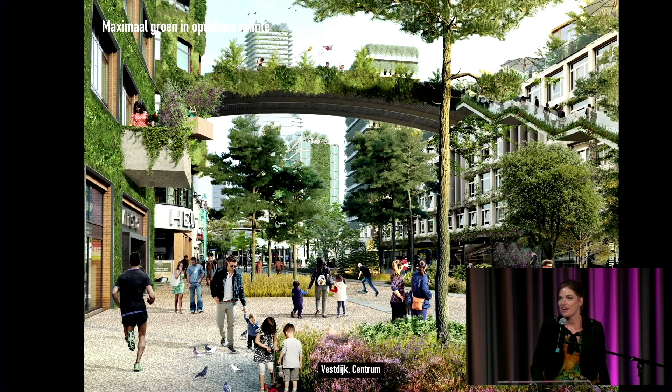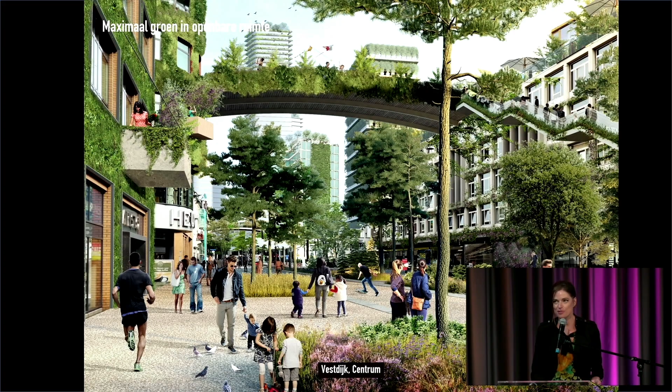You might say, Sana, this is crazy, nobody will do this. But what we say is that if we aim for 400%, along the way we might end up with 100%. So if you just set your ambitions high and actively engage with your stakeholders, things can happen, and a lot starts with initiative. We see that from Matan, who organized all of this - taking initiative and bringing people together is extremely important.

What you see here is the main street to our office in Rotterdam. One of our colleagues created an initiative - she said, this is all stone, we need more green. She started an initiative, bottom up, led by herself, to create green spaces in the city by replacing parking lots with pocket parks and activated gardens. This is a community engagement project. It shows that by working together and collaborating, you can build pilots to inspire people to bring change.

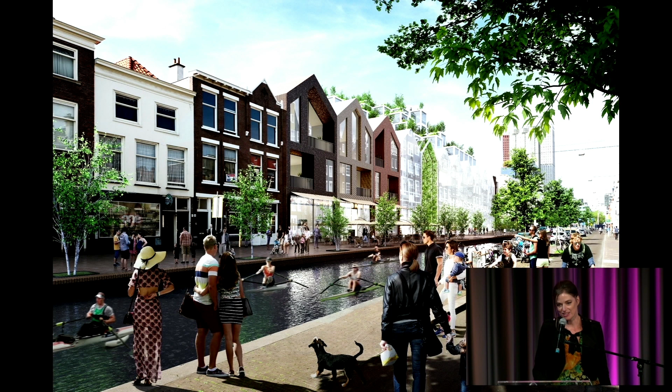The same here in the city of Den Haag. What you see here is a street completely designed for cars, but 200 years ago it used to be a canal. Here too we dream of bringing back the canals to the city, to create space for ecology, but also space for water and space for pedestrians.

And also here, what we did is we not only made a vision, but we also quantified the impact of the vision. How much green can we add? How much air can we purify? How much noise can we reduce? And how much carbon can we not emit?

And also, there's again a business case behind it. So it's not only a green dream that is good for ecology and for people, but it's actually also the economy, creating tourism, an active environment with businesses that can thrive.

We explained this all to the city council, and everybody in the city council from all the different parties were convinced, and with an almost North Korean vote, everybody in the city council voted in favor of this project. So getting people along and getting people to fall in love with green dreams to us is very important.

To take steps, we also do research into how we can get things done and activate green roofs. This is a research that we did in large-scale retail units, in this case in Italy. And what you see here is the most successful architectural export product of Germany.

And this is the Lidl in Augsburg. And what you see here is the Lidl in Tuscany, in Pisa. And it's the same. And this is very strange, because if you want to build a holiday home in Tuscany, you have to follow all sorts of rules and guidelines, and actually Lidl can copy the same thing everywhere.

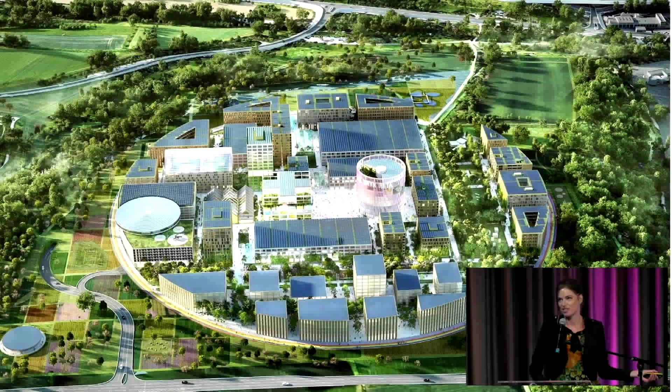We design with ecology, but also with energy, and that's what you see here in this artificial intelligence campus that we're currently doing in Germany, in Heilbronn. And what you see is this green artery that runs through it, but also all the roofs, in this case, are used for energy generation. And this is a case where we actually master plan by designing with energy on the roofs.

And the last example that I'm going to show before we move to Leo is this building here. This is the Valley in the Netherlands. And this is 3 residential towers. And they look a bit rugged along the edges.

The shape of this building has been completely informed by sun, shadow, and wind. So this is an environmental design. And what you see here is that those towers are actually carved, but they're connected with a plinth.

And if we look at the public realm, the streets inside this building, these are actually the roofs. So you would think that this is a street in between the towers, but underneath where there's actually public space with retail and offices. So roofs can actually become vibrant public realms.

And there's one other interesting thing about this project, if you look at it, and that is that you see these balconies, and they are all sort of open to the sky. And last year we presented this project in a lecture in Israel, and somebody approached us afterwards and they said, 'This is great for sukkahs.'

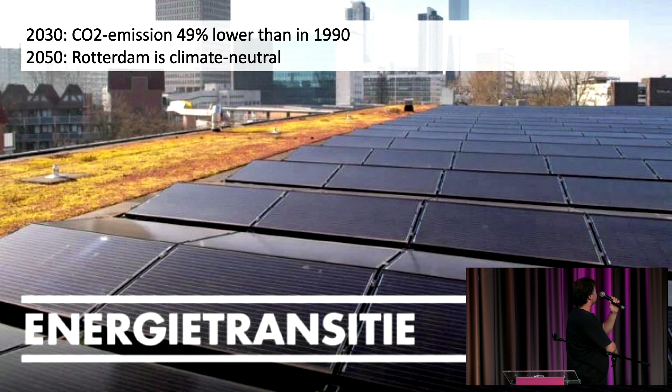In Rotterdam, we can see that a lot of these things are already on the way. There's an energy transition with goals until 2050 to become completely climate neutral. There's a strong drive towards a circular economy, again with 2050 as the roadmap to close the material loop. There's the goal to become climate resilient, with a very ambitious setting of 2025 to become fully climate adaptive. And generally the question of a healthy living environment.

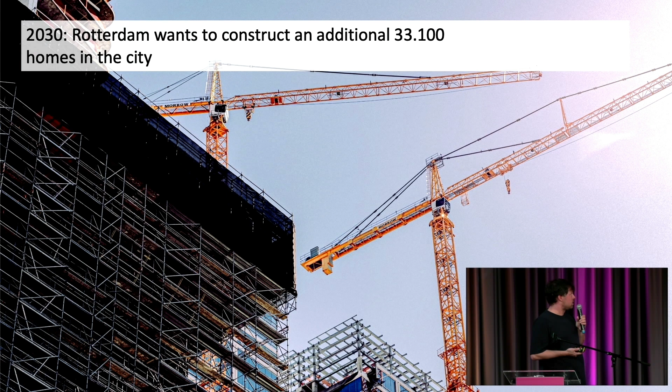At the same time, as I already mentioned, there's the housing crisis - the goal to build 1 million new homes in the Netherlands, and Rotterdam is supposed to absorb 33,000 of those new homes. We'll get back to that at the end of the presentation.

So, how much can rooftops contribute, and in which ways can they contribute to these different crises? You have 5 colors, I think, no? We have 7. It's also very interesting to see that on most of them we are aligned, but then of course some of them, either for climatic or cultural reasons, differ.

So I'll quickly introduce our framework in the Netherlands - not something that we developed, but that we build upon - which starts with social rooftops. Again, a temporary installation on top of the Dutch Architecture Institute in Rotterdam last year, 2022, which both created a new form of access as well as this public podium, hosting events, lectures, yoga lessons, parties, all kinds of things throughout the summer last year.

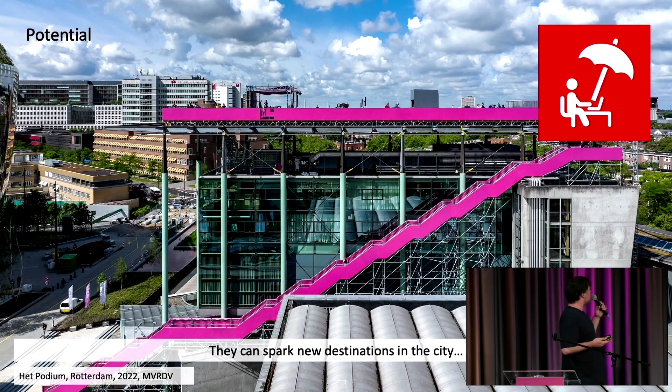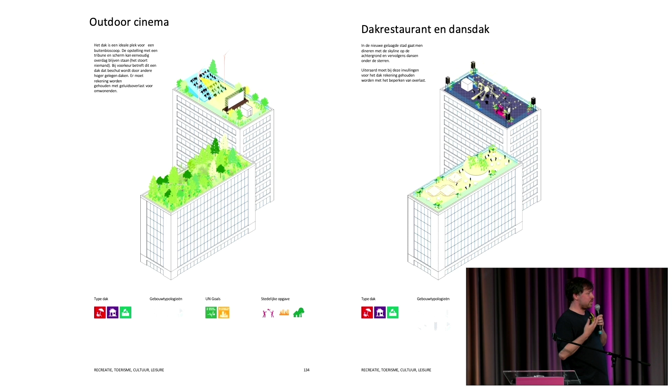But then, of course, there are other forms. And again, the rooftop catalog goes in depth and creates unfeasible, crazy, beautiful imaginaries as well as very practical ones - some of them beer gardens, sky clubs, and so on.

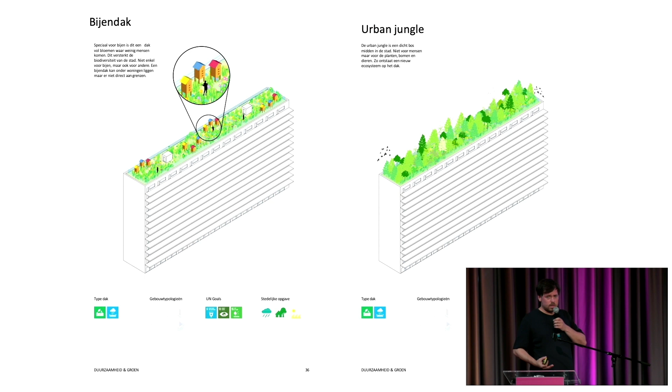Then, of course, the next color is green, biodiversity. I already showed that photo, but of course we could also imagine collective beekeeping on the rooftops - it's happening in a few of them already in the city. Urban jungles, mixity, connection between parks and green areas in the city through rooftops, as the valley actually does.

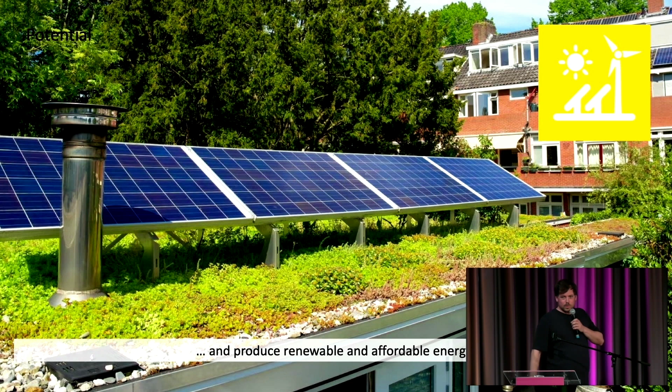And one of the key ones, of course, maybe one of the least visible ones, is energy production - so photovoltaic as well as more complex infrastructure such as power nests.

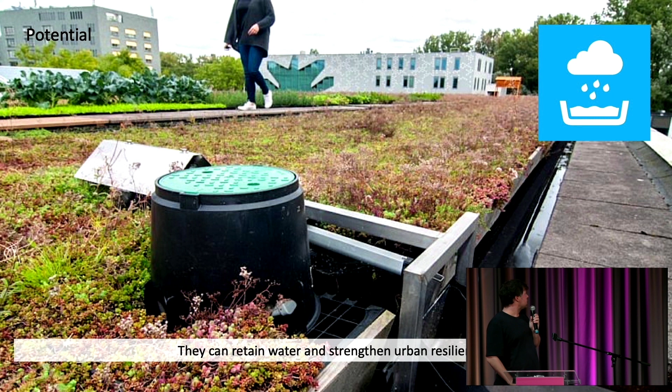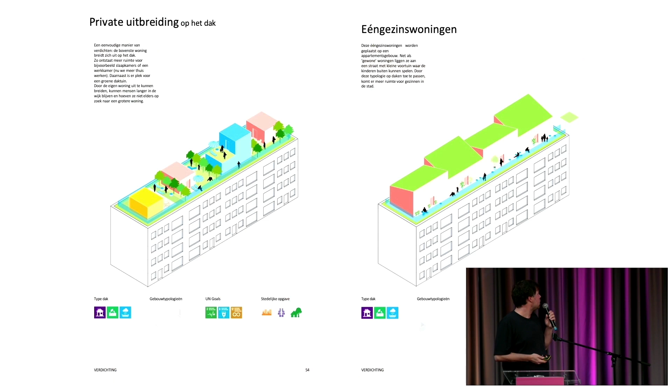In the Netherlands, as you might have heard, it's raining a lot and sometimes really intensely. So also the question of rainwater retention is a thing - storage - and then again with the 1 million homes, how to top up. We have a lot of those. I think this is one of the most extensive sections of the catalog.

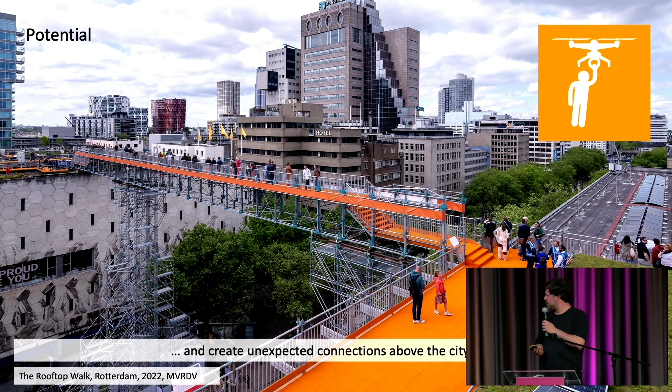Here are some excerpts - another prototype, another realization from last summer. In a way, maybe last summer was our rooftop festival in Rotterdam, which prototyped both the activation of a department store on the left, the central department store of Rotterdam, as well as a series of bridges and public access through the city. It won the Rooftop Award of the Netherlands last year.

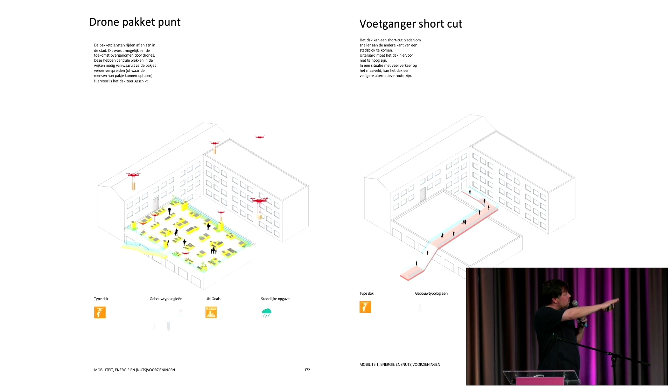And again, there are more experimental settings such as drone delivery stations within the city, and also new pathways and public routes through the city that rooftops could support. Technical infrastructure, of course, is a big part as well.

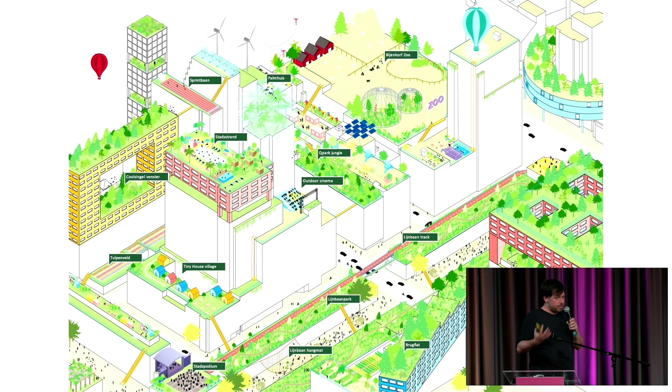But then most importantly is this question of mixity, of multi-criteria rooftops. As the Schieblock shows, social spaces next to urban farming, and so on. So in a way, ultimately, that's the dream that we have - a combination of all 7 colors in a city that is completely accessible on the rooftops and completely activated.

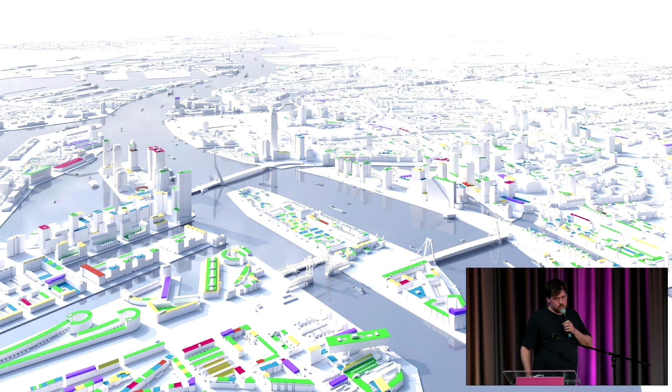So let's go into the software. This is a screenshot - the tool that we developed together with the municipality of Rotterdam is building on a lot of data. So in a way, the first step in the process that we took is just to look at all the data that's available in Rotterdam from various sources.

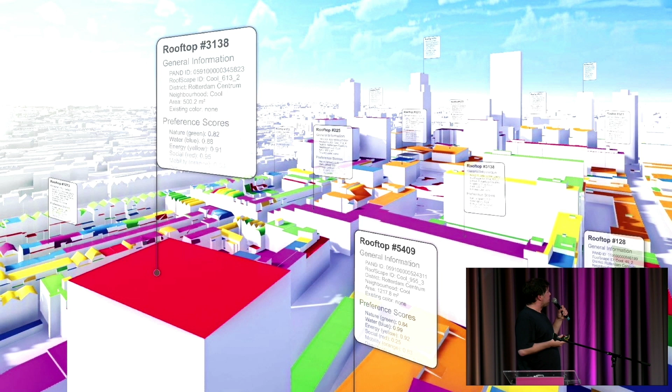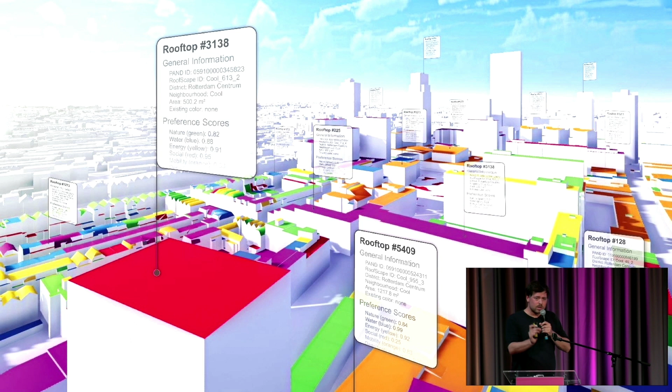And what's very interesting, I think, is that this tool is built 99% on open data. There's one small part on ownership that was obviously proprietary, but the rest is completely open source. The goal that we had is both to have this holistic gaze, to see the whole city at the same time, and to be able to quantify decision-making processes - new regulations as well as subsidies and encouragement towards stakeholders to activate the rooftops - but also to zoom in on the individual rooftop and to visualize the impact that decision-making on the level of a single rooftop can have for the city.

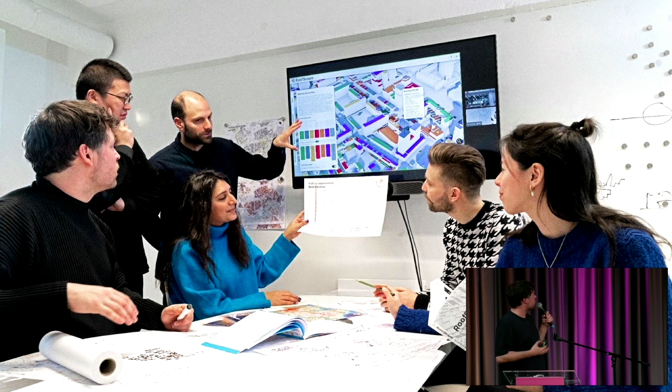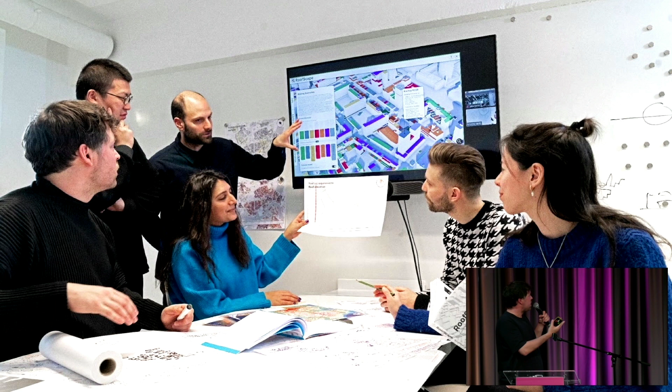At the same time, the way that we designed the tool is as simple as possible. We were going for direct implementation at the municipality of Rotterdam, and the goal was, if you want to bring something in quickly at scale, to keep it as simple as possible. There's a lot of complexity behind the scenes, but as you can see on the screen, it's like 6 or 7 sliders to weigh and relate things against each other. So more than anything, it's a tool that can facilitate conversation, discussion, and collective decision making.

It's an open process, entirely built on open source. Most importantly, it's flexible in the data that it uses. From the beginning, what was important for us was also transferability. We try to tailor it to a Dutch context and to Dutch policy-making processes, but we want to keep the tool transferable. So if we were to bring it to Israel, where the data structures that are publicly available differ, the tool will still work.

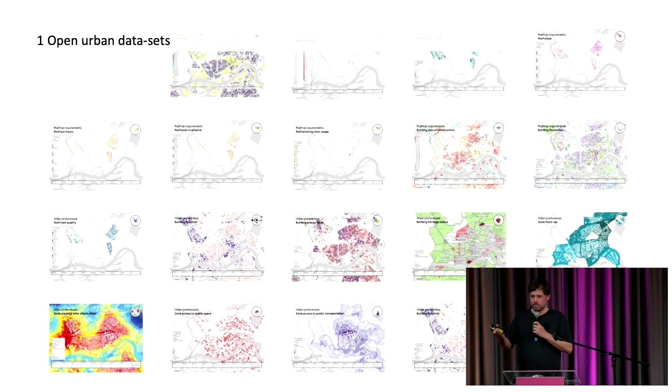I know it's late, so we'll not go too deep into data, but as I said, the key part here is really open source data. What we discovered in the Netherlands is that there's a lot available, and in a way it's very underused. There's this common regime of, let's collect a lot of data, let's map everything, and then we will do... that's the question, no one really knows. That's the feeling that we had, at least.

There's a lot of data, there are digital twins, there's a public model of the municipality, there's another one, there are multiple of these. And in a way, the question is how to operationalize this, how to bring it from a collection of the world as it is now to impacting the world that we want to design together.

In addition to that, we developed our own workflow. Here we utilize architectural tools that we generally employ for the development of our projects, as well as simple computational algorithms to analyze the 3D model of the city and induce more characteristics, which can be spatial, like the heights of rooftops or the inclination of rooftops, or performative, like the energy production potential or the quality of a view.

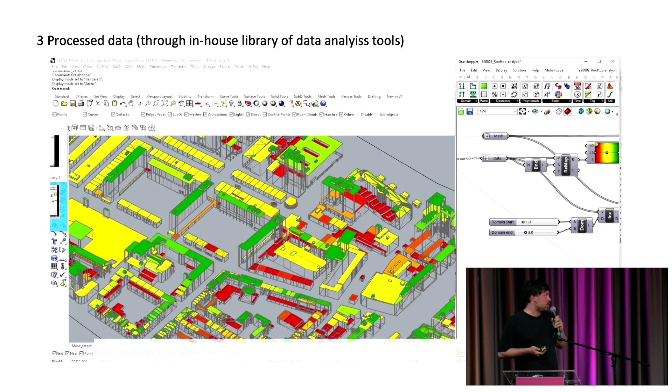So all in all, this is the overview, and in a way the brief of the project. You see we have a roof, or a lot of roofs in the city, and we have a lot of different data sets, and at the end of it, we have our framework in the Netherlands—the colors, and how to connect them.

If we look at the data sets, there are two families, or two groups. One talks about the architectural properties of the rooftop itself—how high is it, how strong is the structure, what could it support, and so on. The second is where is it located, which could fall under, for instance, an area deemed a monument with protection status, or a green corridor of the city. So, what is the capacity of the architectural object, and what is the existing dream, desire, or ambition of the neighborhood it's located in.

What we then developed is essentially a set of recipes for each of these 7 colors to define the preferences and requirements for a rooftop to become green, blue, yellow, or so on. We're able to project not only ideal configurations, but infinite configurations of rooftops that are possible, depending on who you talk to. If we work with the Department of Sustainability in the municipality, this will probably shade towards green and yellow quite quickly. If you talk to the Minister of Housing, who's panicking about how to build a million homes, it will turn purple. So negotiation and discussion, or even a form of gamification of these really complex processes, is what we try to prototype here.

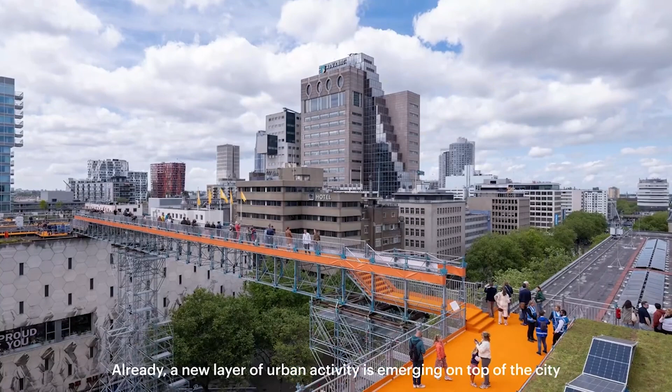Rotterdam has been dreaming about its rooftops for a while now. Already, a new layer of urban activity is emerging on top of the city.

Roofscape is a digital tool that supports the making of rooftop strategies.

How can we help uncover the hidden potential of rooftop landscapes? How can we foster their development through policies and strategies? How can we identify a variety of rooftop programs that work together and show their positive impact on the city? How do we envision rooftop strategies that are created and used by everyone?

Let's explore the Roofscape prototype, an interactive open application that generates insights on the basis of extensive urban data sets.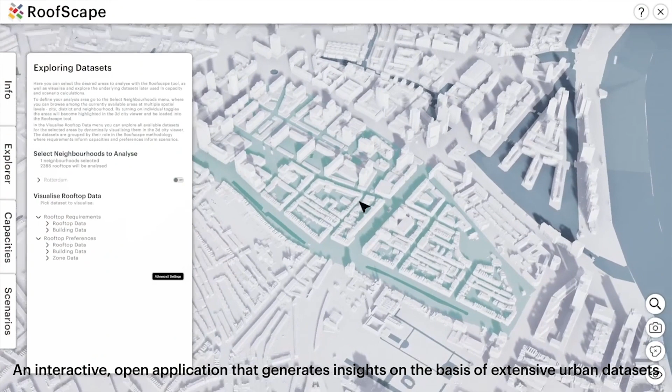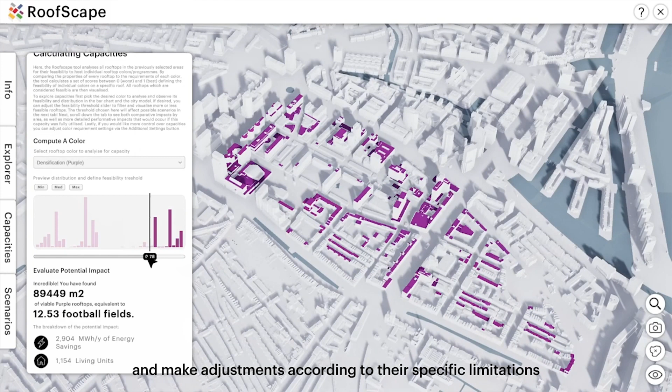Users can select target areas in the Explorer, load all relevant data sets for the target area, and calculate the target area's rooftop capacities. They can also visualize the rooftop capacity for a single program and make adjustments according to their specific limitations. Roofscape's Scenario Maker combines all activity potentials at once and allows users to adjust these activities according to specific urban needs.

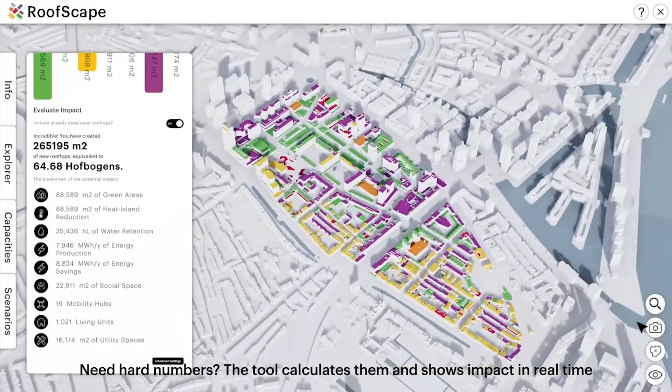Need hard numbers? The tool calculates them and shows impact in real time. The methodology for these calculations is outlined in detail within the openly accessible Roofscape report.

Roofscape is an ongoing interdisciplinary collaboration between the City of Rotterdam, MVRDV, and Superworld. Want to know more or join us? The application and a detailed report are openly available at the link in the description below.

So where are we right now? We're essentially at this point talking with cities, mostly in Europe and the UK, seeing how we can transfer this, expand the tool, and tailor it towards new contexts.

At the same time, within the Netherlands, we applied it - I mentioned initially that there's a housing crisis going on, and an essential question of this is capacity. So there's a goal of 1 million homes. How do you divide this? How do you assess how much each of the cities and even neighborhoods can contribute to it?

So for Rotterdam, we ran a study on the whole city. We analyzed 18.5 square kilometers of rooftops. And we actually came to the conclusion that if you filter towards realistic top-ups, on the rooftops alone, we could create nearly 60,000 new homes, which is twice as much as is currently required.

We remember it was around 33,000 homes. So that's interesting, at least at this point already, to discuss with politicians and understand, for instance, to challenge the question of new construction. Like, if you can top up all of these rooftops, we wouldn't have to build any new structures.

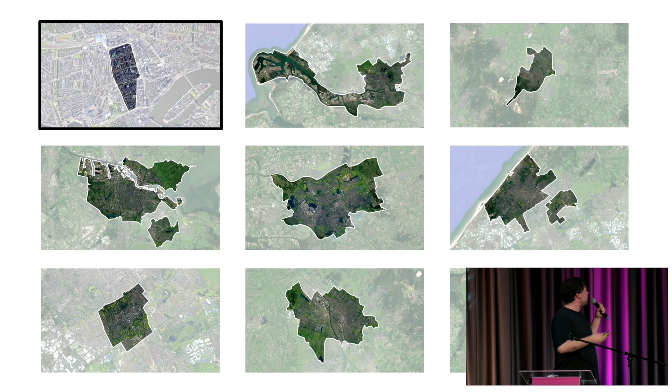So what we're interested to discover, to get a feeling for, is what does Jerusalem need, what does Tel Aviv need, what does Haifa need, and what would be the context that we're operating in here - what are the challenges that you're facing, and how to transfer the tool, which of the elements, which of our insights that we already developed could be transferred, and what we have to completely redevelop to make it suitable here.

So for this, we'll have a workshop tomorrow afternoon, hosted by Sanne, myself, our colleague Jaka, Dana, Matan. So, big group. You're all invited. We're looking forward to it.

But so basically, it's a first step of bringing this tool to Israel, and we're very excited. Thank you.